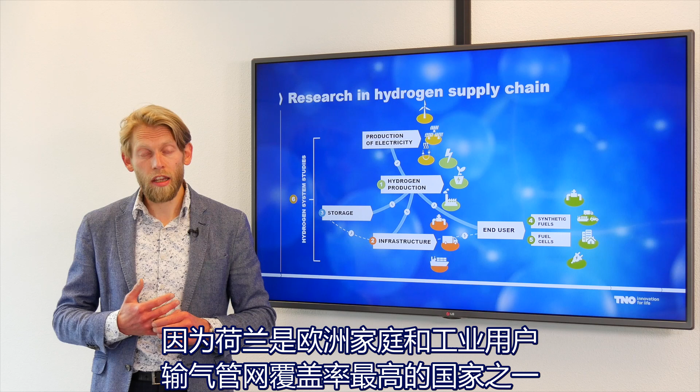So looking at this slide, here you see the hydrogen supply chain. We're looking at hydrogen production, mainly green, but also low carbon hydrogen. We're looking at storage of hydrogen underground, in salt caverns or empty gas fields. After that, we're looking at the infrastructure. Can we reuse existing infrastructure in the Netherlands? Because the Netherlands is one of the countries with the most extensive gas infrastructure to all the housing and industry. And part of the infrastructure we definitely can reuse.

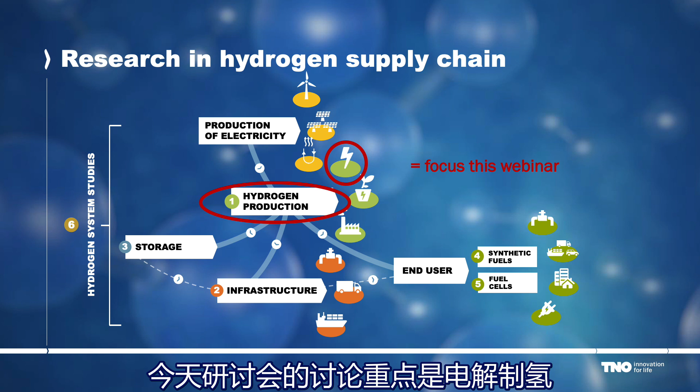And at the end, we're looking at the use of hydrogen in different applications, in the automotive, in the aviation. And really important is the system approach. We always need to look where hydrogen is the best solution compared to, for example, heat pumps, compared to direct electrification options. So hydrogen will play a key role, but we look at the different options available. In this webinar I will specifically focus on the hydrogen production by electrolysis. So the other aspects are not included in this presentation.

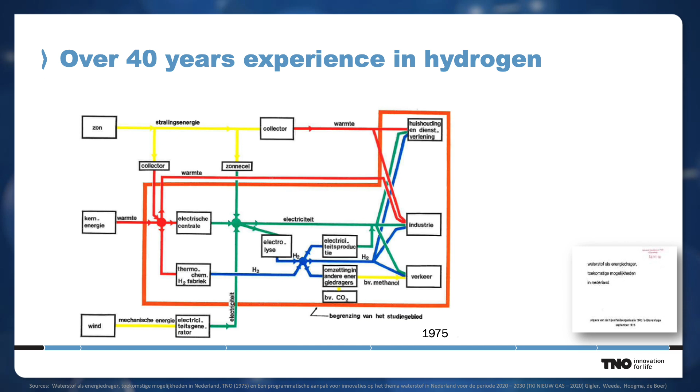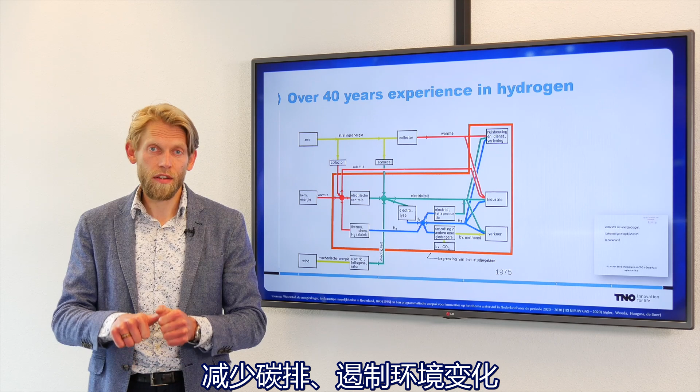A bit about the history. As TNO, we already worked 40 years on hydrogen. This is a paper from 45 years ago where we explained that hydrogen will get a major role in the energy transition. The difference between 45 years ago and where we're standing now is that then the driver was mainly nuclear energy. And now there are a couple of drivers: as I explained, CO2 reduction, the climate driver; the cheap electricity prices going down all the time; and we need the storage solutions. So now there are more drivers why hydrogen will stay, compared to 40 years ago or even 10 years ago.

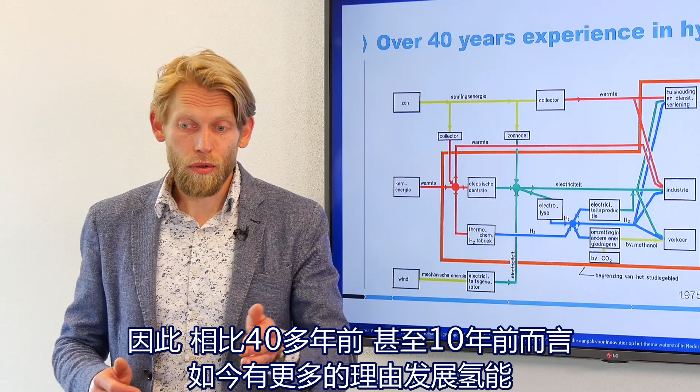So the hydrogen economy will grow definitely. And here you find a report TNO worked on, where we advised and actually made a roadmap for the Dutch government on what is needed to make clean, green hydrogen available the coming years.

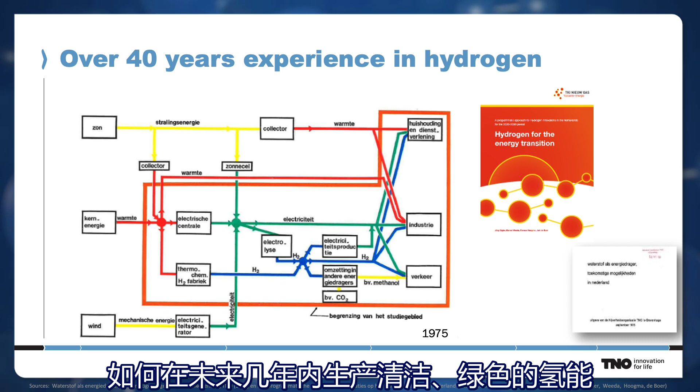Now we'll start first worldwide, what's happening on electrolysis, and then we'll go down to Europe, and Germany and the Netherlands. This picture shows the current status of electrolysis worldwide. In the last 10 years, 100 megawatts of electrolysis was built, mainly for the use of mobility and in industry.

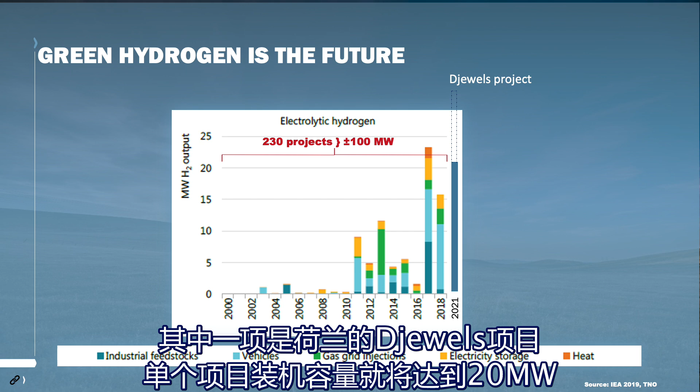So that's not really a lot. So actually, if you look at the 100 megawatts over, let's say, 230 projects, and if you look now, there are a lot of projects in the pipeline, and we'll discuss that a bit later in this webinar. One project we're looking at in the Netherlands is a Djewels project. That project alone is already 20 megawatts. So you see the project size and the amount of projects is increasing.

But just looking from a different perspective, if we look at hydrogen, for example, compared to solar energy, hydrogen, especially electrolysis, is like 10 or even 20 years behind where solar is standing now. So we really need to let the market grow and further develop the technology.

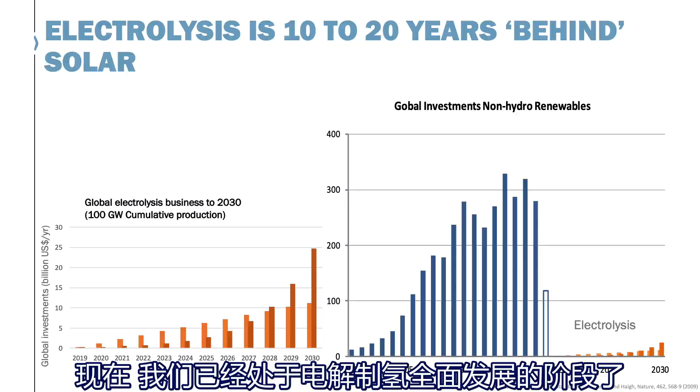What are the main drivers for green hydrogen? This is a really important map where you see what are potential leading countries where electrolysis can be competitive towards the alternatives. And the main drivers are, for example, wind and solar power. They looked at the amount of solar during the year and the amount of wind during the year. I also include the Netherlands and Germany here. And this is not an extensive list, just a number of countries are given.

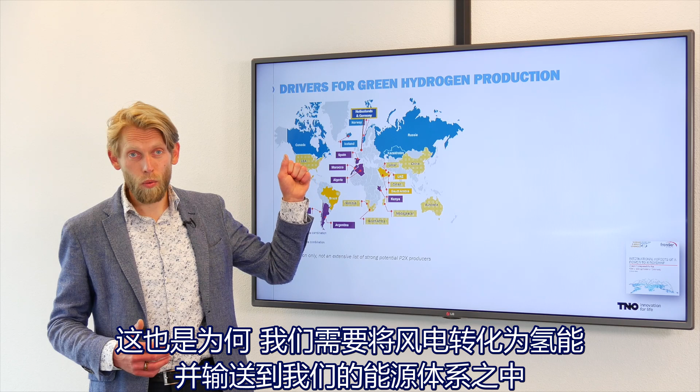But if you look at the Netherlands and Germany, we're now building the largest wind park in the North Sea. And we've got a capacity in the complete North Sea of over 150 gigawatt. So we've got a huge potential of renewable energy, for example, in the North Sea. And that's why we need hydrogen, to convert the wind energy to hydrogen and to bring it into our energy system.

The next thing is the role of ports in this whole picture, which is really important. Because in the future hydrogen will be an international market and hydrogen will be transported from one country to the other, and the role of ports, of harbors, is really important to bring the hydrogen further, for example, into Europe.

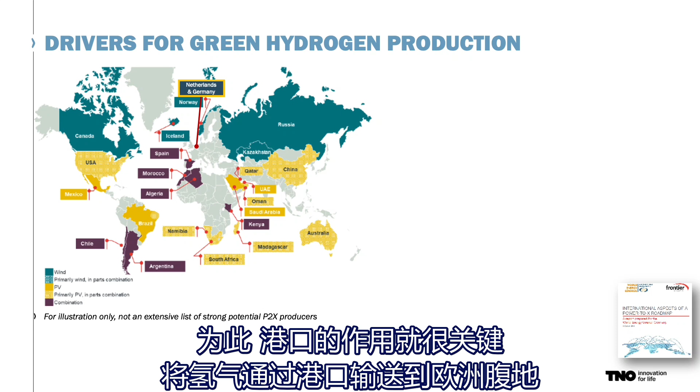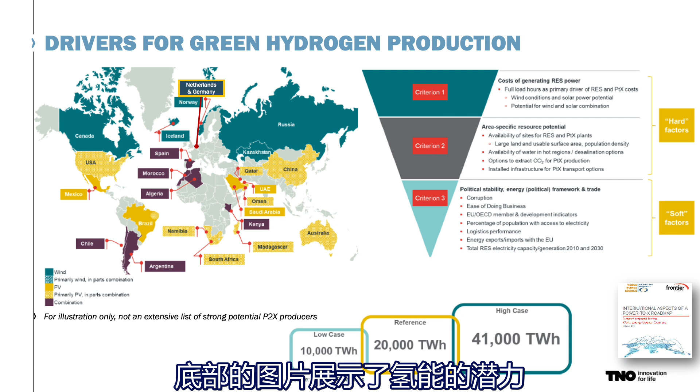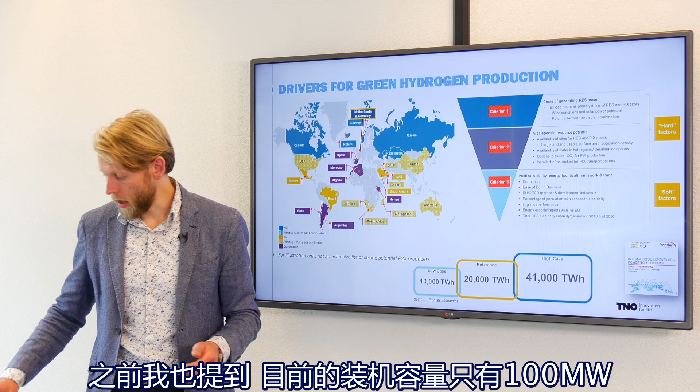Beside the technical drivers about renewable potential, there are also a lot of market drivers, infrastructure, which determine which country, which area, which continent even, will be, let's say, the first movers on hydrogen. And this graph says something about the potential. Different scenarios are given. If we take the mid scenario, they're saying that in 2050 the potential capacity of electrolysis will be somewhere between 4,000 and 6,000 gigawatt. And imagine, as I was just saying in the beginning, up to now 100 megawatts installed. So the coming 30 years, you've got a great opportunity, a great challenge to work on.

What's Europe doing now in the field of electrolysis? Hydrogen is now a key element in the European strategy and the European Green Deal. This summer, the Clean Hydrogen Alliance will become more concrete, and the Netherlands and Germany are really leading this initiative. And I think it's of great importance that industry, government, and the transport operating companies work together, because it's not only about production, it's about infrastructure, it's about storage, it's about the whole supply chain.

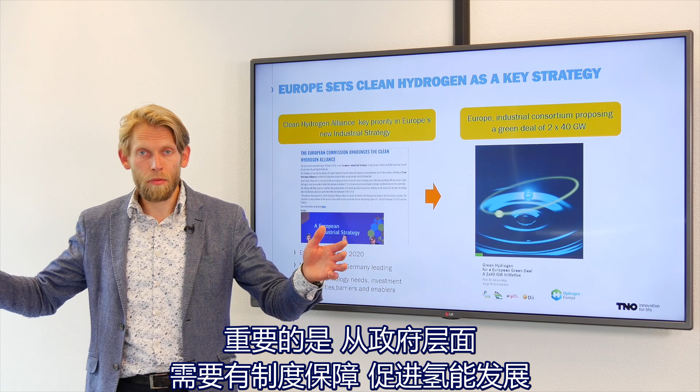And it's important that from the government side, a scheme needs to be there to actually stimulate this development, in such a way that it's not too much pushing hydrogen, but makes clean hydrogen available compared to the alternatives. And one of the nice examples is an initiative from Hydrogen Europe to go to 2 times 40 gigawatt in 2030.

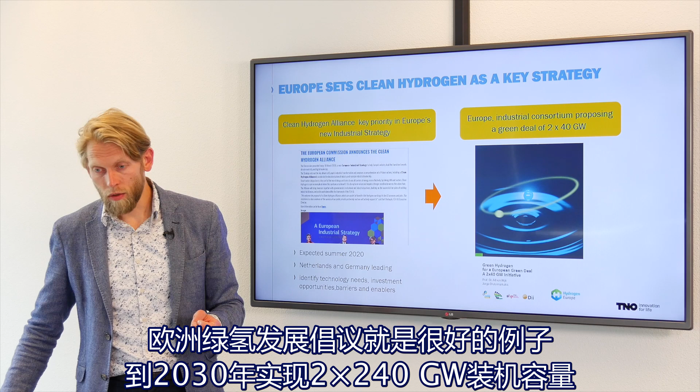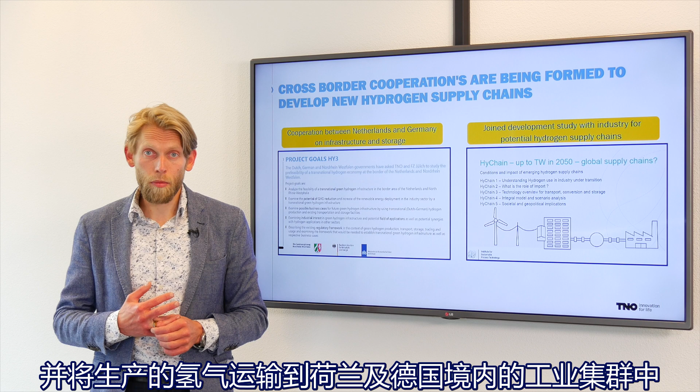One important thing is cross-border cooperation. These are 2 nice projects TNO is working on. One is with Germany, where we're actually looking at: can we use current gas infrastructure, can we use the storage capacity, can we connect the wind energy in both the Netherlands and Germany, produce hydrogen and transport it around Germany and to the Netherlands to the different industrial clusters. This kind of cooperation between the Netherlands and Germany, and also between other countries, is really important, because one country can't do this alone.

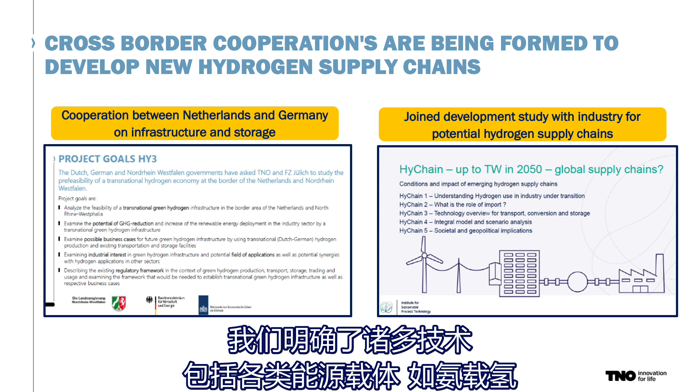And the second one I want to talk about is the HyChain project, where we identified a lot of different technologies and energy carriers, hydrogen, but also energy carriers like ammonia, and what the future hydrogen market will look like, what the potential future new demands are, what the future costs are, and how this market can be developed.

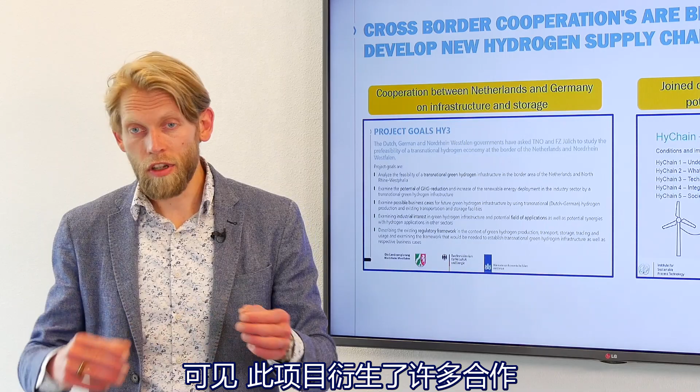And we identified 8-9 countries where hydrogen production can take place, and now bilateral discussions are going on, for example, can we maybe import hydrogen from Morocco towards the Netherlands? So a lot of initiatives are coming from there as well.

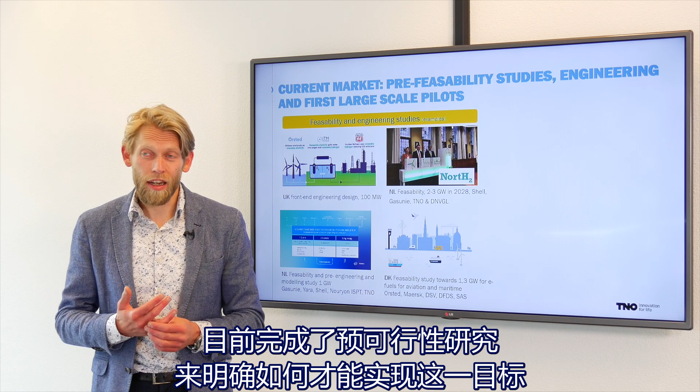Where are we standing now? Up to now, there are a lot of pre-feasibility studies, engineering studies, and first large-scale pilots. I'll just give a couple here. For example, we work on the North H2 project, where the ambition is to go to 2-3 gigawatts before 2030. And it's a pre-feasibility study to see what's needed to actually make this possible.

One of the challenges we see there, for example, is the supply chain. If you look at the electrolyzer stack, there are maybe now 2 or 3 parties delivering the membrane for the electrolyzer stack. So the complete supply chain is not developed yet. So in order to build really large gigawatt systems, we need the whole supply chain of the stack manufacturers, the components developed, and even the material supplies.

The whole supply chain needs to be developed, and that's one of the things we look at, what's needed to actually make the 2-3 gigawatts possible within this decade. And all the other studies are looking at that as well. And the interesting thing is they're all connected to wind turbines, which is needed because it only makes sense to make green hydrogen connected to wind or solar, but also to look at alternative demands, for example, aviation fuels or the maritime sector. So these are feasibility studies.

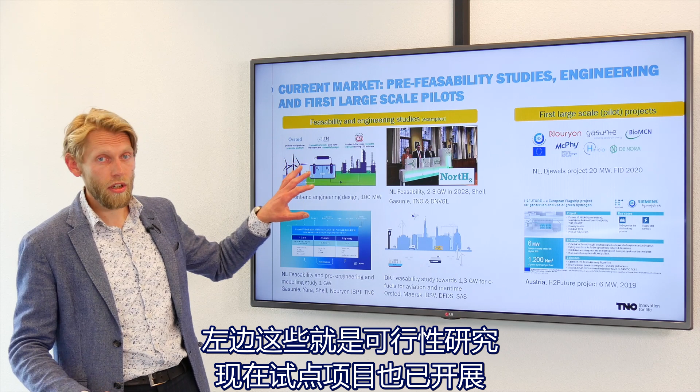Also pilots are now on the way in the north of the Netherlands. A 20 megawatt initiative was signed this year. And in Austria a 6 megawatt electrolyzer system is already running, connected to a steel plant, producing green hydrogen there. Designing a gigawatt electrolyzer plant is not that easy.

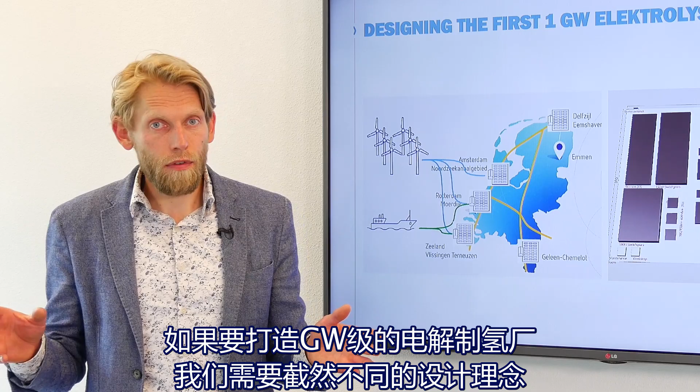Up to now, projects have been done on a megawatt scale and there are containerized solutions. If we want to build a gigawatt electrolyzer plant, we need a complete redesign of the plant itself. And this is a sketch of how such a design can look. We've got here this design for an alkaline system. We've got the different stacks standing here. We've got a separate unit for the water demineralization. We've got a central compression. We've got obviously a high voltage connection.

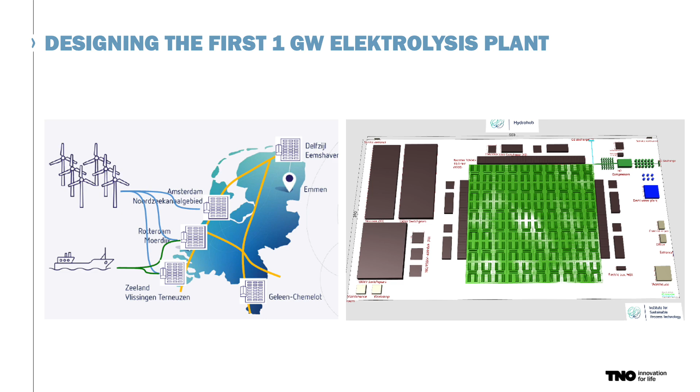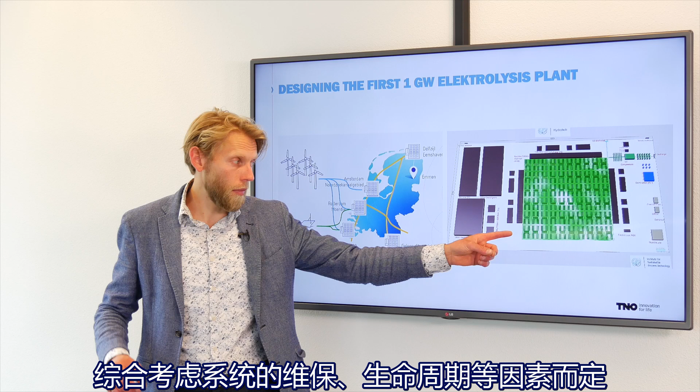And an optimal design is really crucial to get to the cost reduction, because a lot of the costs are in the electrolyzer stack, but a lot is also in the whole electrolyzer system and the power connections. So an intelligent design is really important, and there are a lot of variations, mainly thinking about maintenance and the lifetime of these systems. That's what we're working on continuously.

What's happening now in the Netherlands? I started with the international, I went to Europe, and now going into the Netherlands. Over 25 large projects are announced, and the projects differ. There are projects on the North Sea where we're building an electrolyzer on an existing platform to see how an electrolyzer behaves in sea conditions. We're looking at hydrogen storage, how does it work if we store hydrogen underground in an empty salt cavern? How can we learn from it, and what are the opportunities there?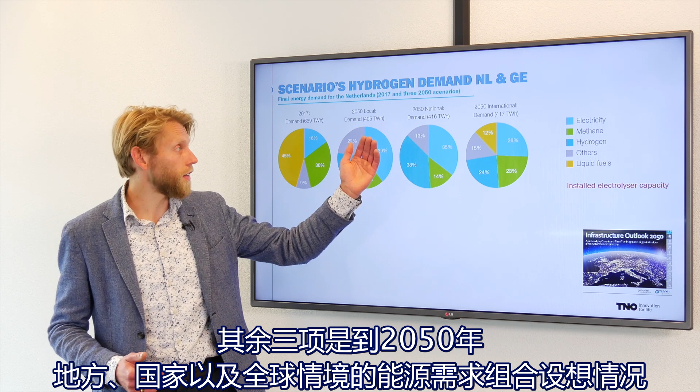One is the current demand in the Netherlands, our energy mix, and three demands in 2050, looking at the local, the national, and the international scenario. This is for the Netherlands. And you see that in this energy infrastructure outlook from the gas grid operator together with the transmission grid operator, they see hydrogen will get around 24% up to 38% in our total energy mix. Electricity is obviously much more, 39%. And the same for Germany, the numbers are a bit lower.

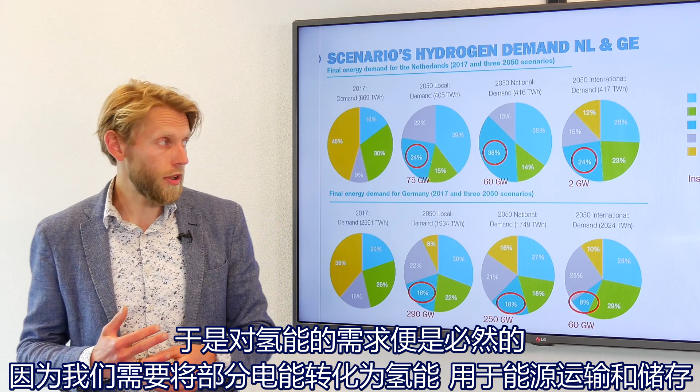But if we look at what will be the installed capacity in the Netherlands or in Germany with electrolysis, in red you see here the installed capacity, and there you see a big difference. In a local or national scenario where we're really investing in the Netherlands and Germany in local renewable energy, so we're investing a lot in wind, a lot in solar, then there's definitely a need for hydrogen, because we need to convert some of that electricity into hydrogen and store it and transport it. In an international scenario, our local production will be much lower, and we will import a lot of that hydrogen. So the installed capacity in the Netherlands and even in Germany is much lower.

And current policy really is a combination of local and national. And import will get a role, but not as big as in this scenario. That's the current policy outline.

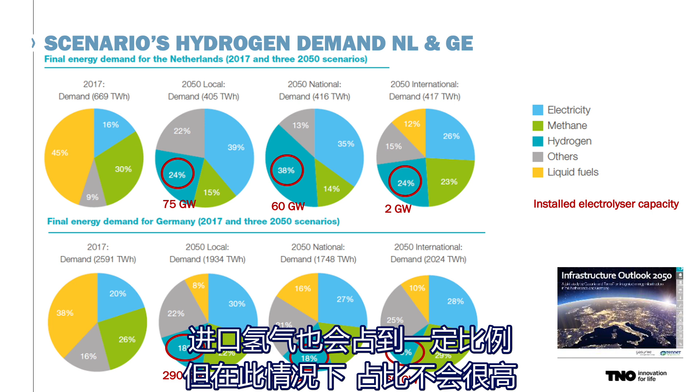How much hydrogen are we using today in the Netherlands? The Netherlands is, together with Germany, the largest hydrogen user and producer in Europe. Here you see some graphs from 2017 to 2019 where hydrogen is used in different industrial clusters. And important to say, this hydrogen is now used, for example, for refineries or for fertilizer production. If you're looking 20 years further, you can question whether this industry will still exist and stay in the Netherlands.

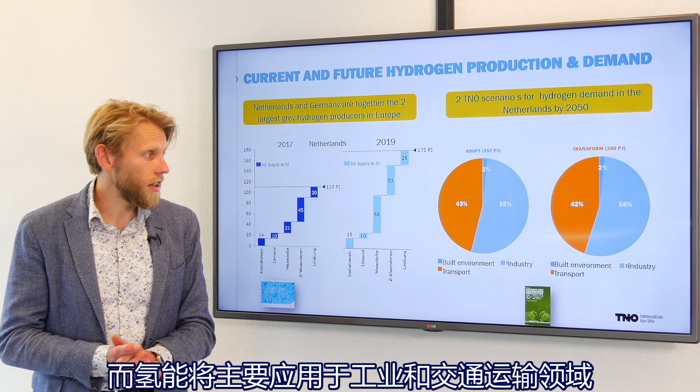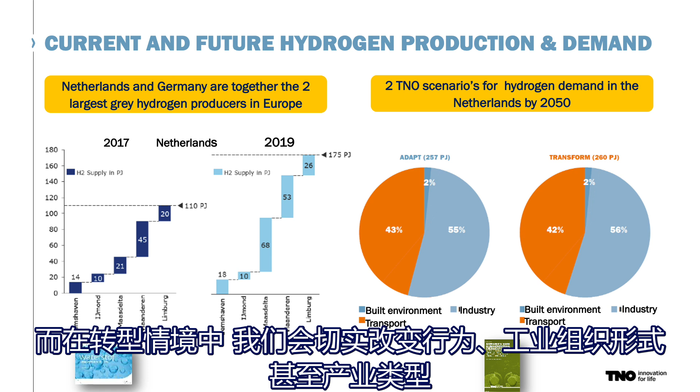I just gave the scenario from an infrastructure perspective. As TNO, we worked on two scenarios on how our energy system will look in 2050. And these are completely other numbers. Here we see the different sectors: built environment, industry, transport, and we see hydrogen will be mainly used in transport and in industry. In the adapt scenario, we're not making major changes. In the transform scenario, we're really changing our behavior, the way industry is now organized and the type of industry we have.

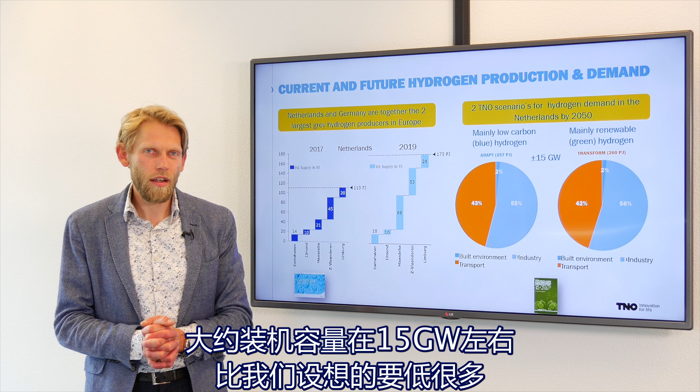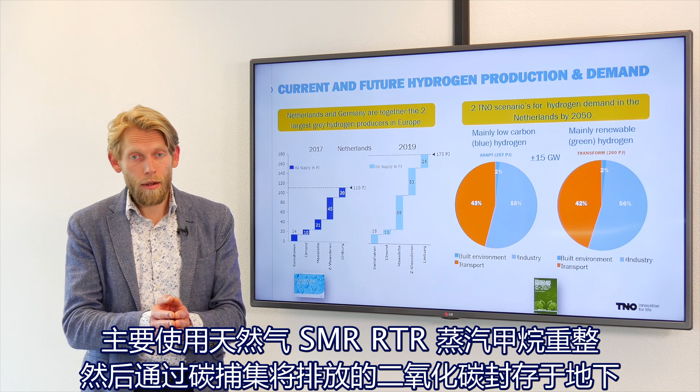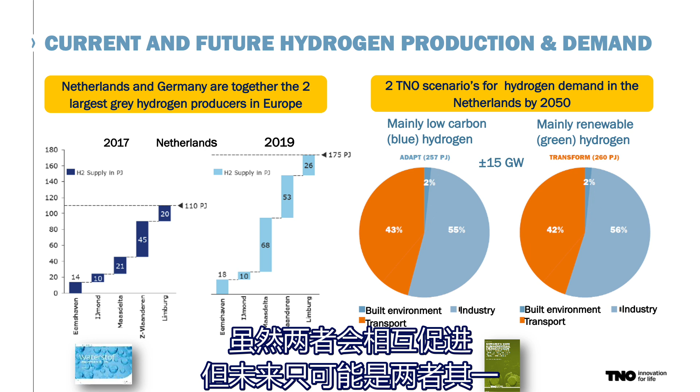And if we look now at the numbers, hydrogen is 257 petajoules in both, about 15 gigawatts installed capacity in the Netherlands, much lower. And the difference between those scenarios is that in this scenario, it's mainly low carbon hydrogen, so mainly using gas, SMR, ATR, steam methane reforming, and capturing the CO2 and storing it in the ground. And in this scenario, we're mainly producing hydrogen based on electrolysis. So there's definitely a competition between both. They can facilitate each other, but in this scenario, it's one or the other.

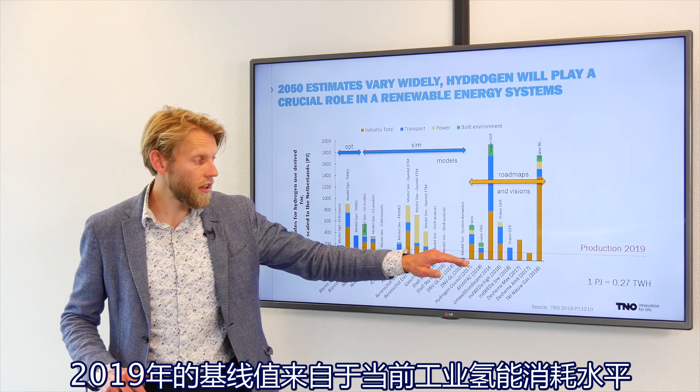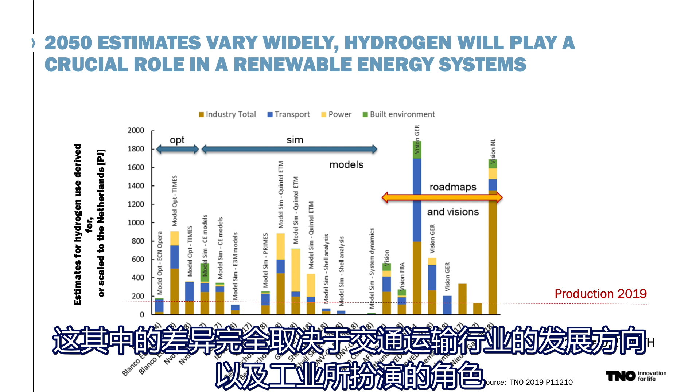But important to say, these are scenarios. We analyzed in the Netherlands more than 20 different scenarios. On 2019, you see here the baseline demand based on the current industry. And there's quite a big range: the hydrogen demand in the Netherlands in the coming 30 years will stay the same, or will be like 5 or maybe a factor 10 larger. And the difference is really what transportation will do and what the role of the industry will be.

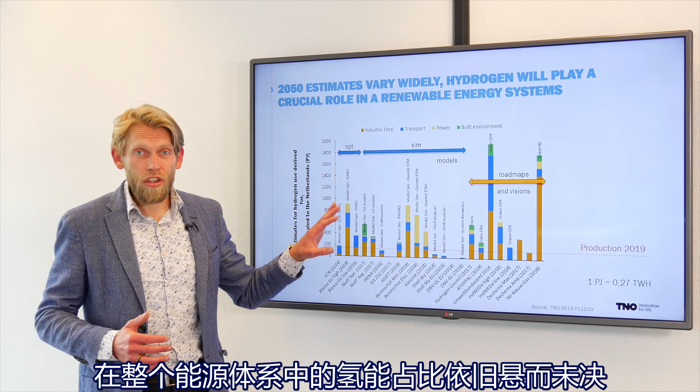So the main message I want to say here: hydrogen will play a key role, definitely electrolysis, because otherwise we can't integrate all the renewables into our energy system in the Netherlands and Europe or even worldwide. But the role of hydrogen in our complete energy system really is uncertain. It will be 5%, 20%, or even 30%.

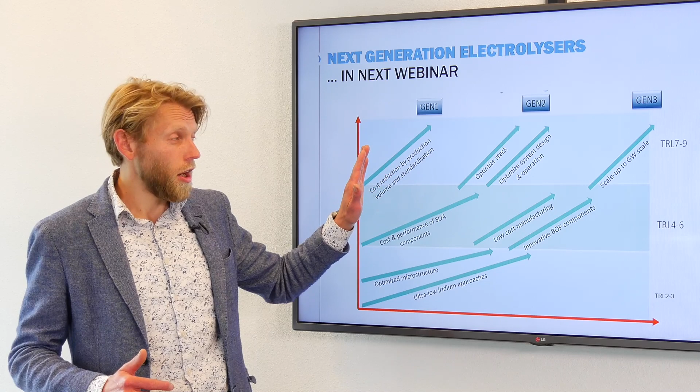I'm already coming to the close of this webinar. We organize a next webinar, and then we really go into the electrolyzer, and we talk about next generation electrolyzers. This picture shows the current generation electrolyzer we're looking at now, and that's where we want to go towards gigawatt scale. But as TNO, we also develop the next generation electrolyzer, and what are the main challenges? And when will that next generation electrolyzer be ready?